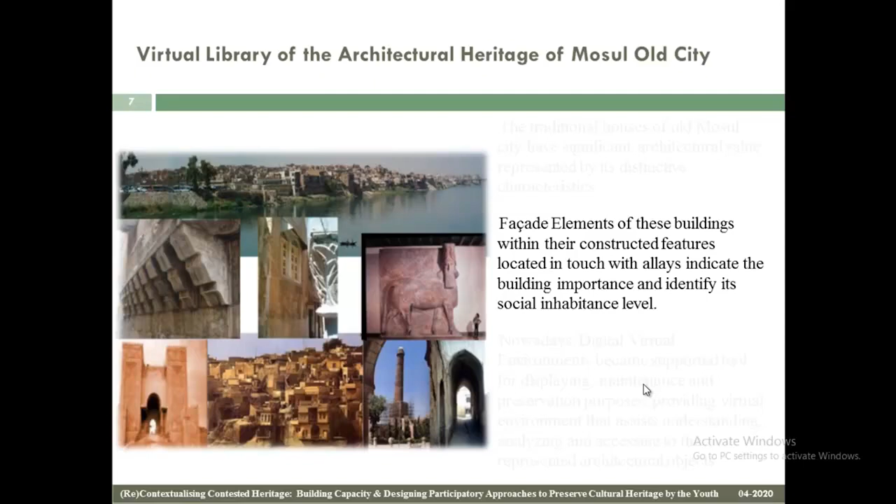The traditional houses of Old Mosul city have significant architectural value represented by their distinctive characteristics. Facade elements of these buildings, within their constructed features located in touch with alleys, indicate the building's importance and identify its social inhabitants' level.

Nowadays, digital virtual environments become a supported tool for displaying, maintenance, and preservation purposes, providing a virtual environment that assists understanding, analyzing, and accessing the represented architectural objects.

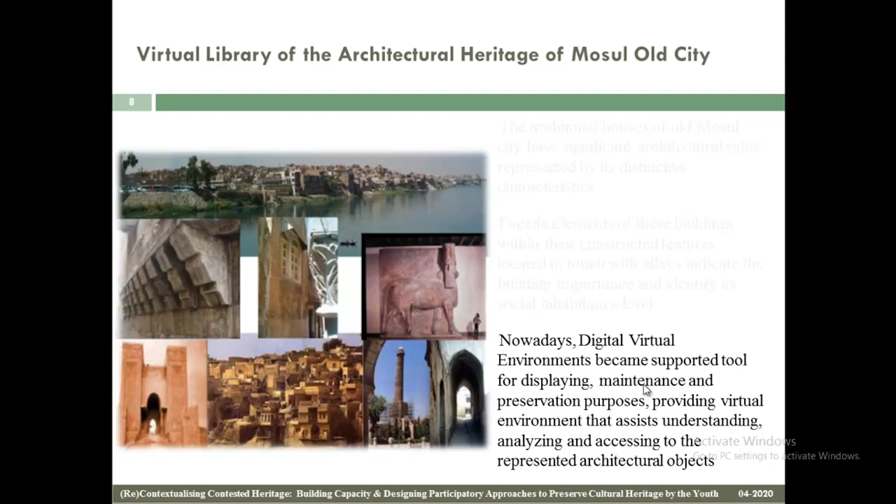The project aims to present guidelines and recommendations for creating the historic building information modeling for the entire architectural elements of the building in the Mosul Old City.

The project also aims to present an HBIM procedure for providing a virtual library for the constructed features of the facade elements of the traditional Mosul domestic buildings, as the first phase, by collecting, analyzing, and classifying these elements into categories.

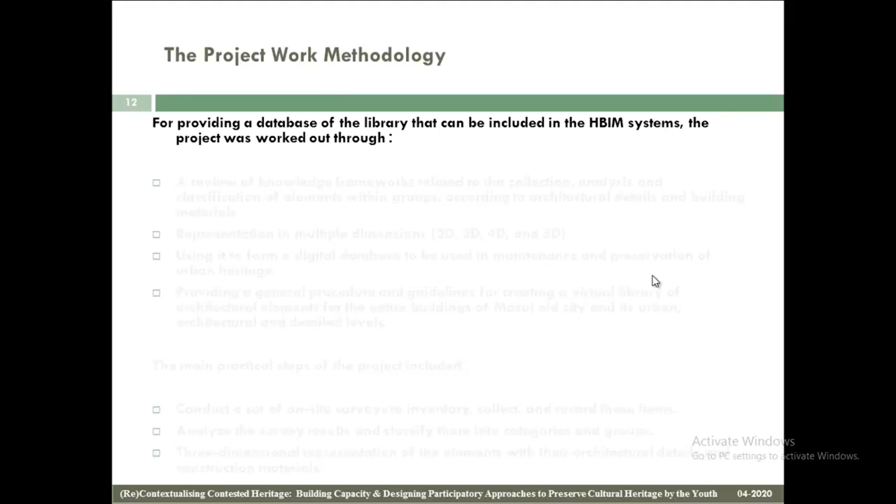For providing a database of the library that can be included in the HBIM systems, the project worked through a review of knowledge frameworks related to the collection, analysis, and classification of elements within groups according to architectural details and building materials, and representation in multiple dimensions: 2D, 3D, 4D, and 5D, using it to form a digital database.

To be used in maintenance and preservation of urban heritage, and providing a general procedure and guidelines for creating a virtual library of architectural elements for the entire buildings of Mosul Old City at its urban, architectural, and detailed levels.

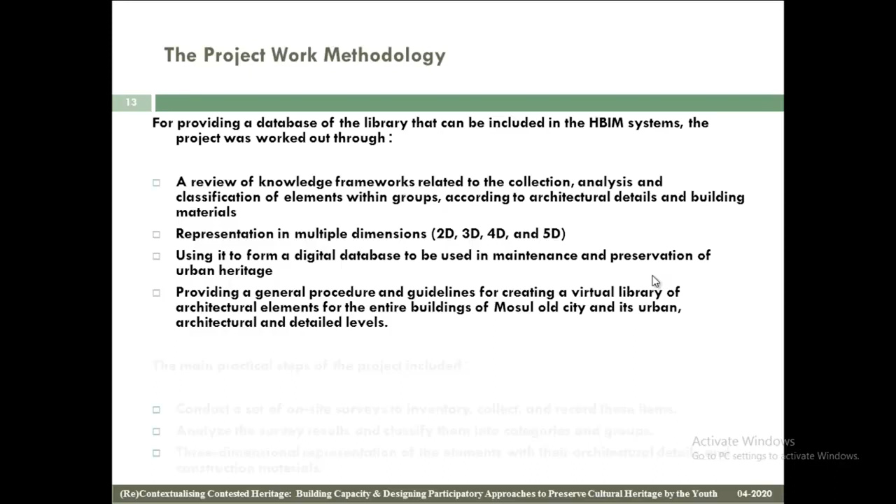The main practical steps of the project included: conduct a set of on-site surveys to inventory, collect, and record these items; analyze the survey results and classify them into categories and groups; and three-dimensional representation of the elements with their architectural details and construction materials.

To achieve the project objectives, three related aspects in key sections of this research are studied, discussed, and utilized in order to determine the information and results required. Those are conservation and Mosul Old City, and computer software such as CAD, virtual reality, and HBIM.

Here is the detailed work plan for the project. We can see the plan of this project.

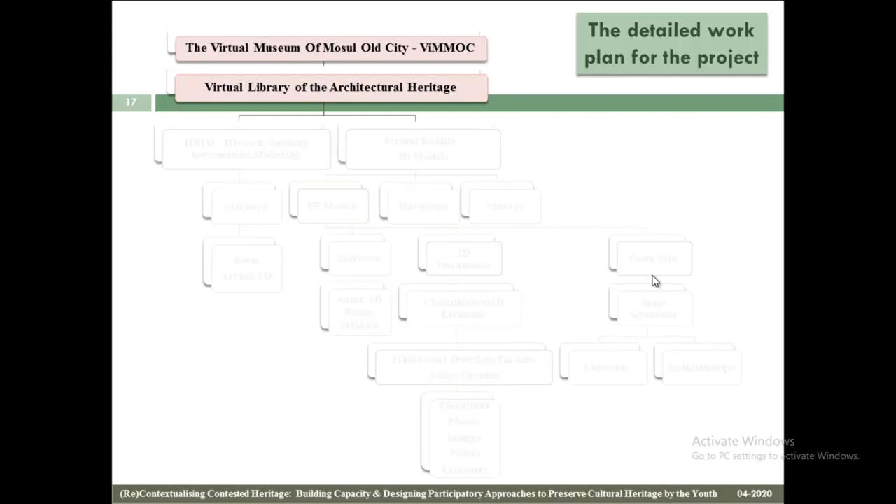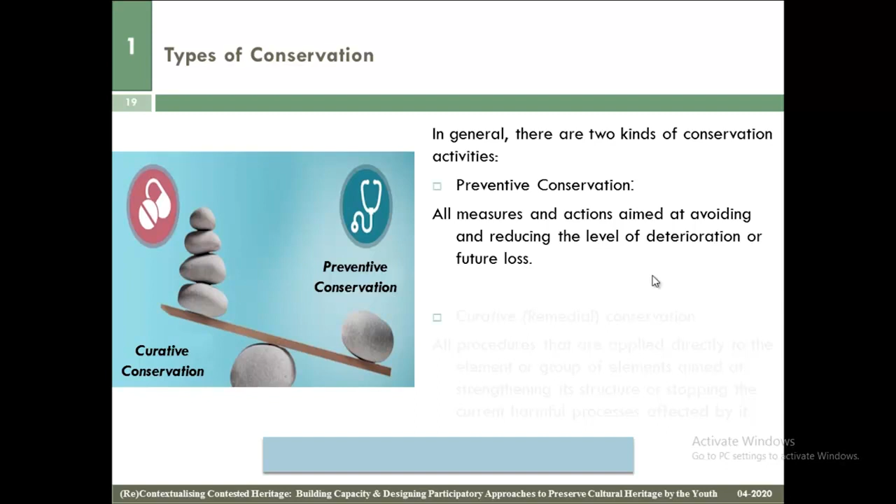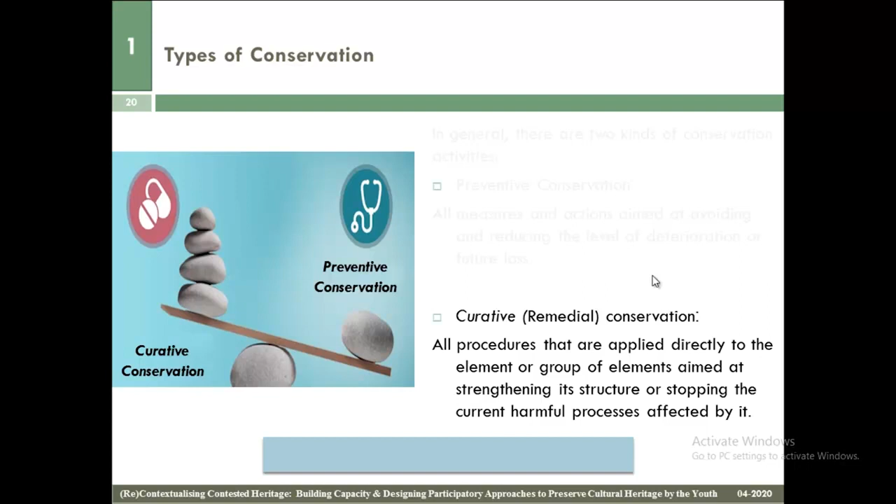Types of conservation: in general, there are two kinds of conservation activities. Preventive conservation involves all measures and actions aimed at avoiding and reducing the level of deterioration or future loss. Curative conservation involves all procedures applied directly to the element or a group of elements, aimed at strengthening its structure or stopping the current harmful processes affecting it.

Preventive conservation is directed to prevent eventual problems. It is related to the provisions about the supposed natural aging and about the expected anomalies. The timing and the frequency of preventive and completing maintenance can be expected.

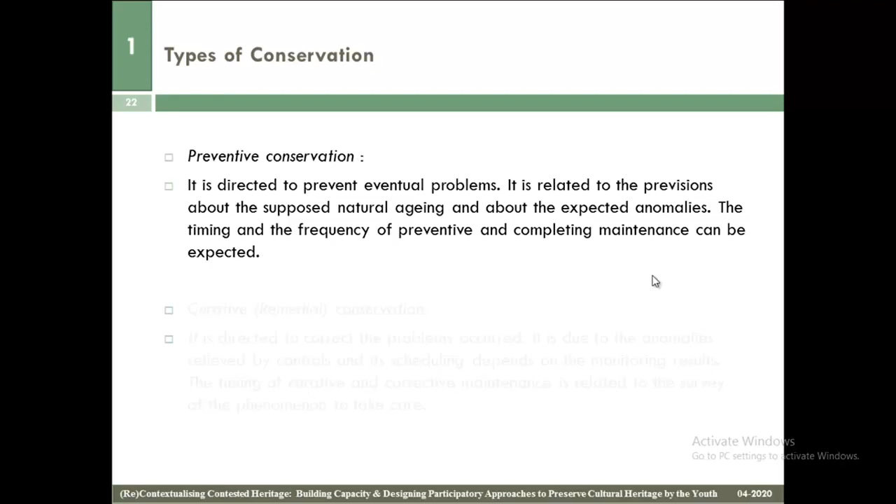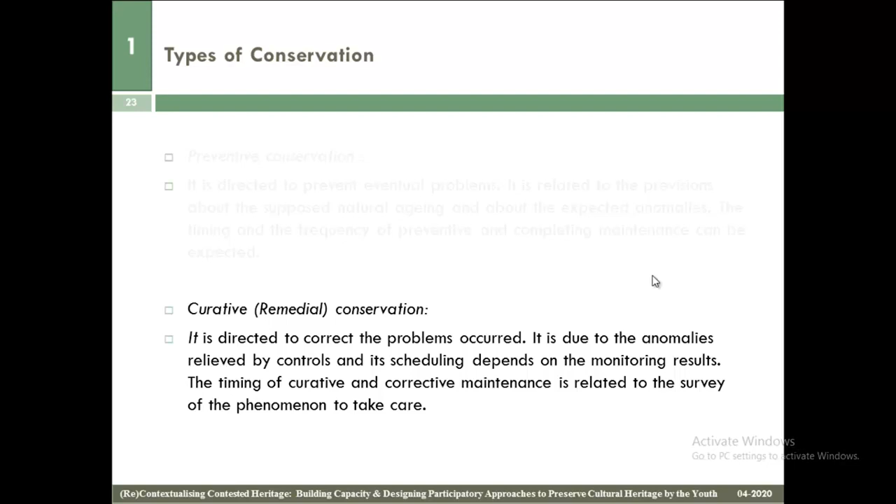While curative conservation is directed to correct problems that have occurred. It is due to the anomalies revealed by controls, and its scheduling depends on monitoring results. The timing of curative and corrective maintenance is related to the survey of the phenomenon to take care of.

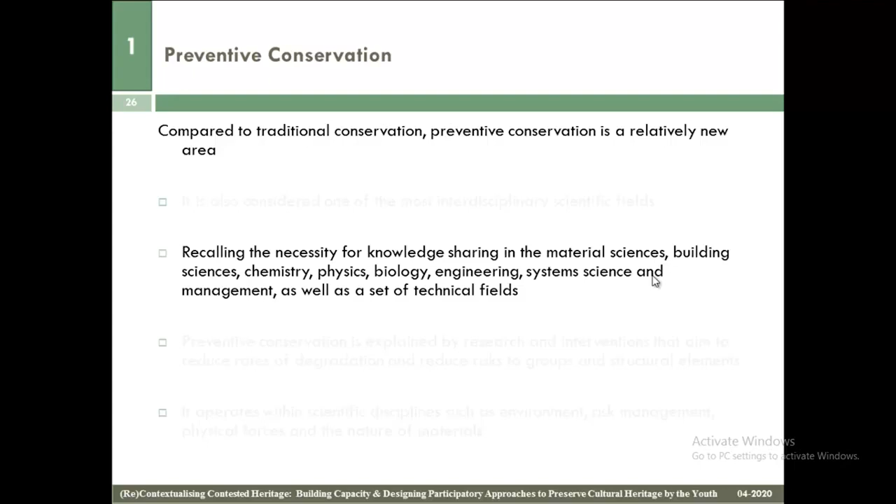Compared to traditional conservation, preventive conservation is a relatively new area. It is also considered one of the most interdisciplinary scientific fields, recalling the necessity for knowledge sharing in material science, building science, chemistry, physics, biology, engineering, system science, and management, as well as a set of technical fields.

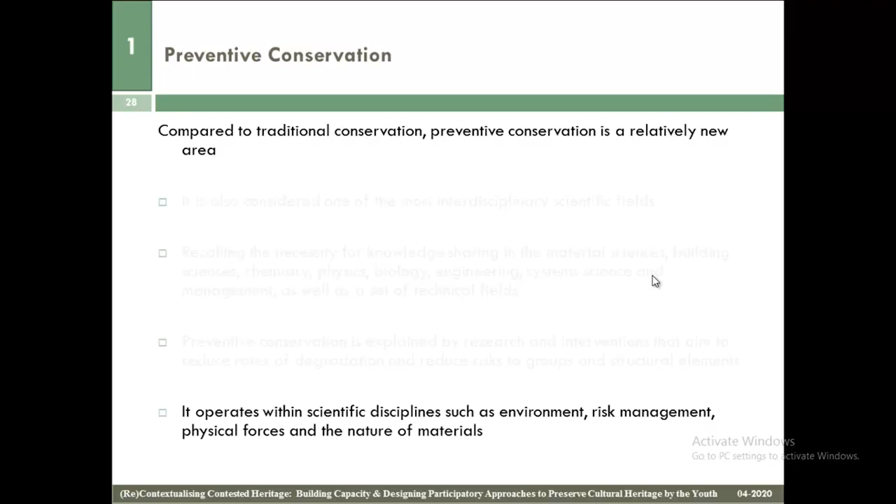Preventive conservation is exploited by research and interventions that aim to reduce rates of degradation and reduce risks to groups and structural elements. It operates with scientific disciplines such as environment, risk management, physical forces, and the nature of materials. The aspects of preventive conservation include management of environment, risk, documenting, schedule investigation, information, regulation, human resources, and communication.

What is important here is the management of information exchanging and representing.

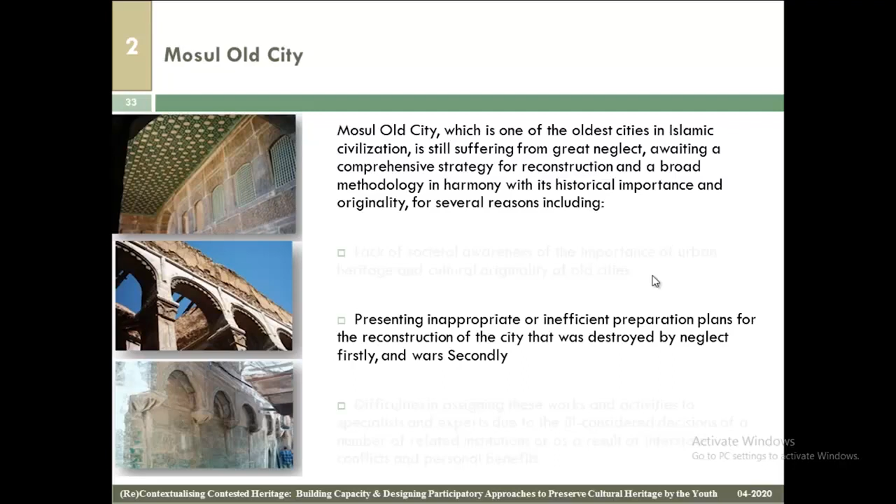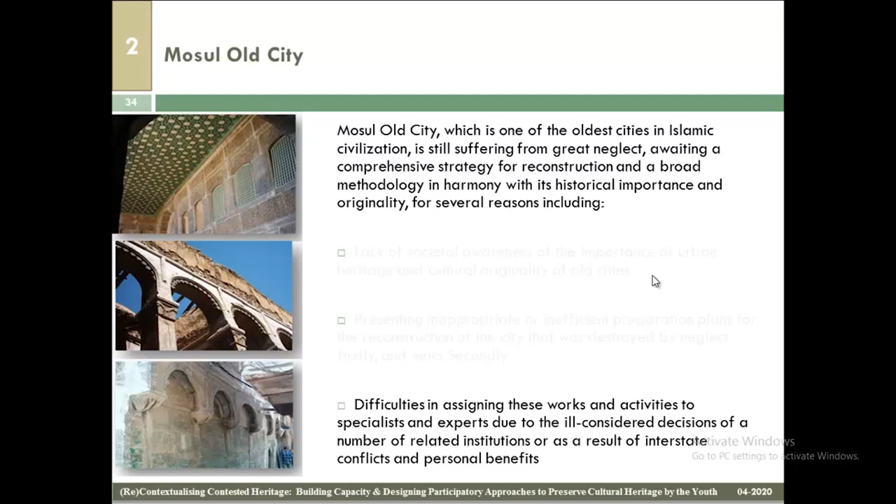The second aspect is Mosul Old City, one of the oldest cities in Islamic civilization, still suffering from great neglect, awaiting a comprehensive strategy for reconstruction and a broad methodology in harmony with its historical importance and originality. This is due to several reasons, including lack of societal awareness of the importance of urban heritage and cultural originality of cities, inappropriate or inefficient preparation plans for reconstruction of a city destroyed by neglect and then by war, and difficulties in assigning these works to specialists due to ill-considered decisions by related institutions or as a result of interstate conflicts and personal benefits.

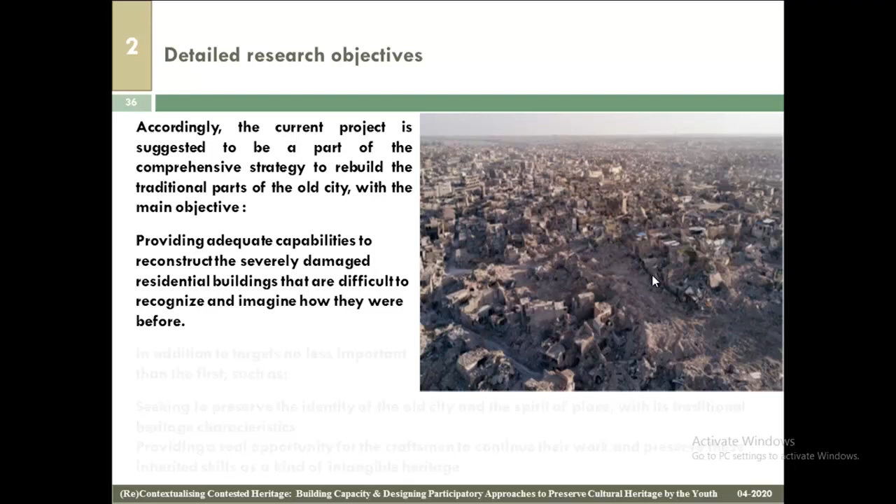Regarding the detailed research objectives, the current project is suggested as part of a comprehensive strategy to rebuild the traditional parts of the old city, with the main objective of providing adequate capabilities to reconstruct severely damaged residential buildings that are difficult to recognize and imagine how they were before.

In addition, there are targets no less important than the first, such as seeking to preserve the identity of the old city and the spirit of a place, genius loci, with its traditional heritage characteristics, and providing a real opportunity for craftsmen to continue their work and preserve these inherited skills as a kind of intangible heritage.

The detailed research objectives are: documentation of knowledge, formalization of information, providing common references for inhabitants of the cities, designers and architects in their projects, multi-dimensional representation as a means of study of historic buildings, simulation of restoration of buildings partly or completely destroyed, and data management on internet networks.

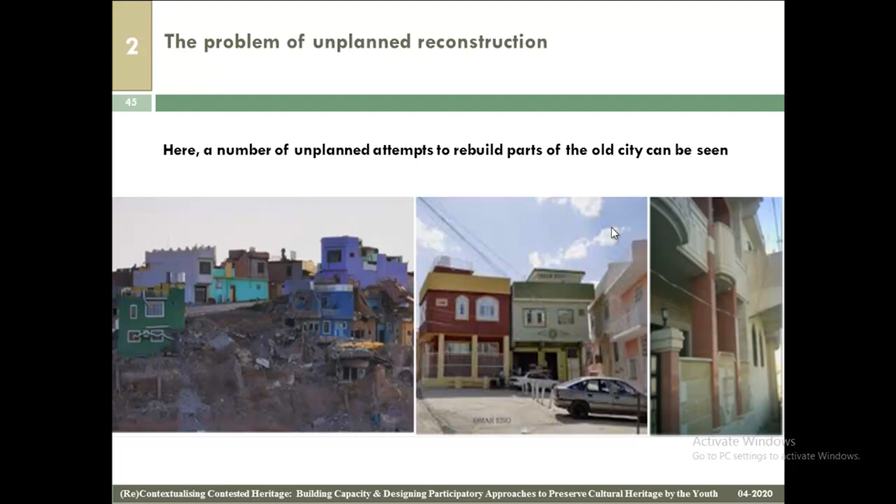Here we can see a number of unplanned attempts to rebuild part of the old city of Mosul.

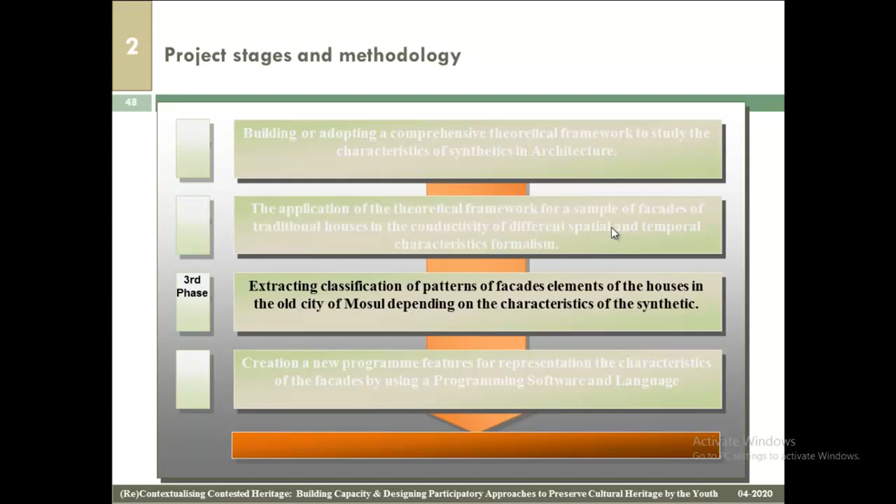Here is the project stage and its methodology, which consists of 4 phases to create the virtual library.

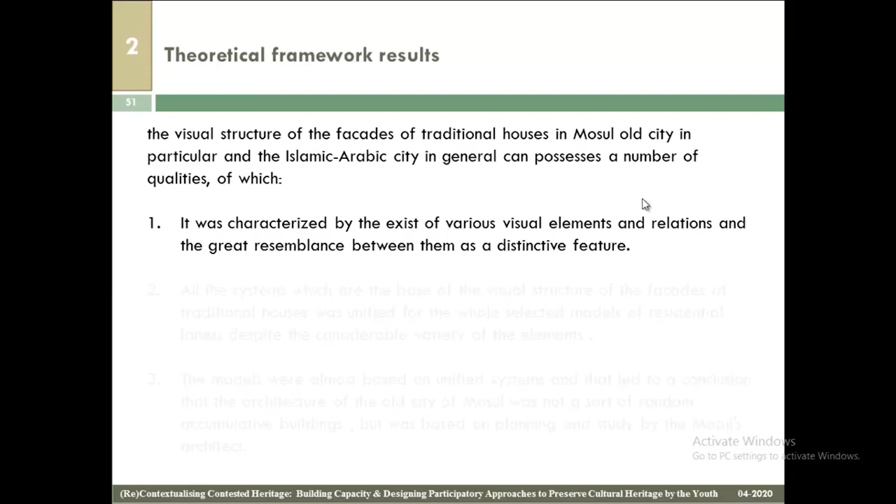The theoretical framework results in the visual structure of the facades of traditional houses in Mosul Old City in particular, and the Islamic Arabic city in general, possessing a number of qualities characterized by the existence of various visual elements and relations, with great resemblance between them as a distinctive feature.

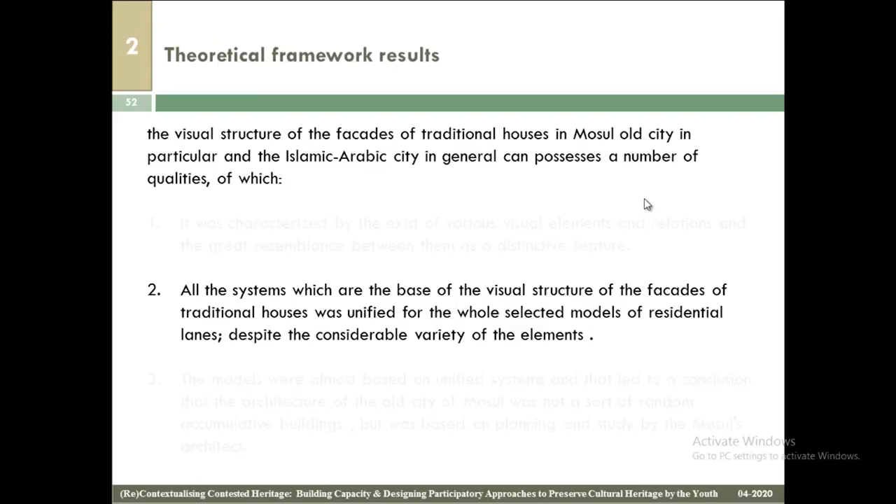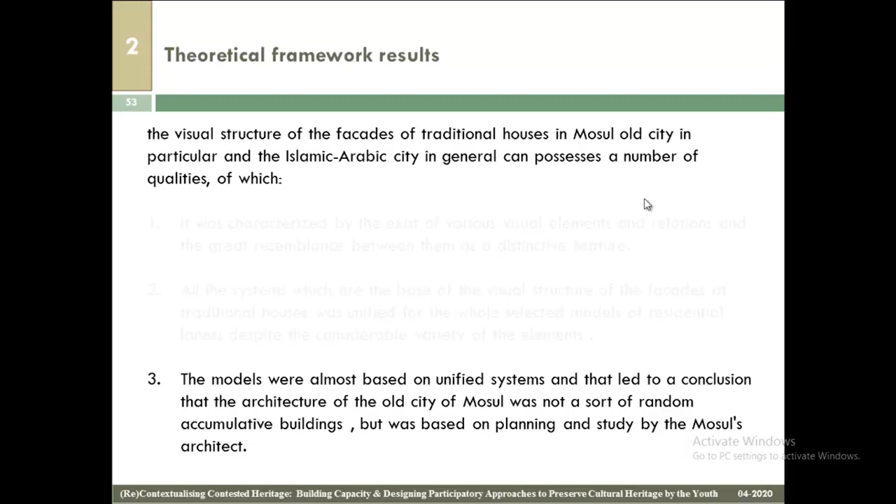All the systems that form the base of the visual structure of the facades of traditional houses were unified across the whole selected model of residential lanes, despite considerable variety of elements. The models were almost based on unified systems, leading to the conclusion that the architecture of the old city of Mosul was not a sort of random accumulative buildings, but was based on planning and study by Mosul's architects.

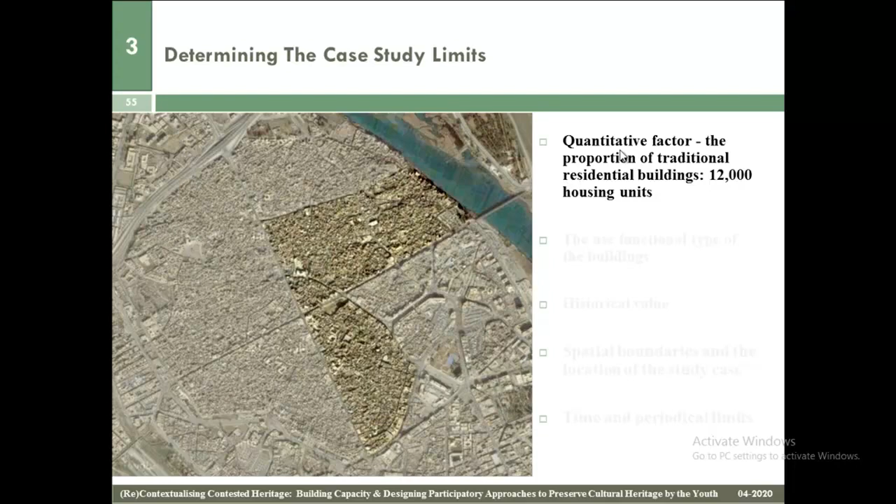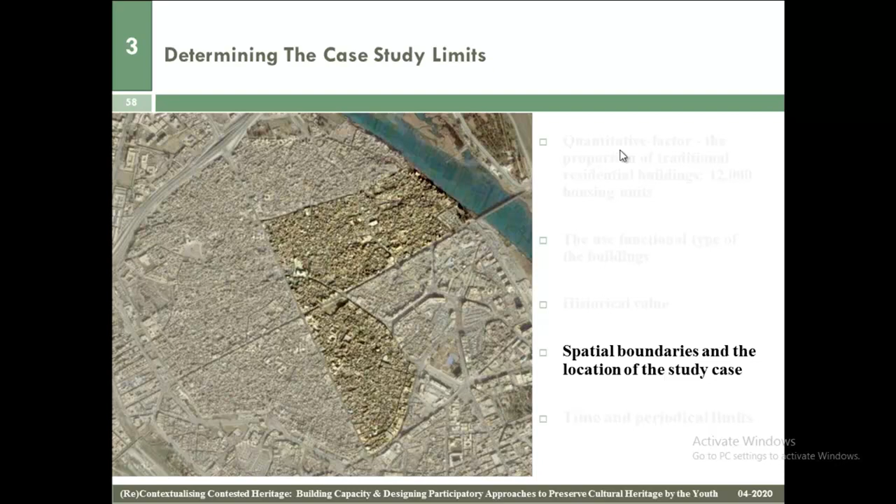Determining the case study limits depends on many factors, such as the quantitative factor - the proportion of traditional residential buildings, about 12,000 housing units - the functional use type of the buildings, historical value, spatial boundaries, the location of the study case, and time and periodical limits.

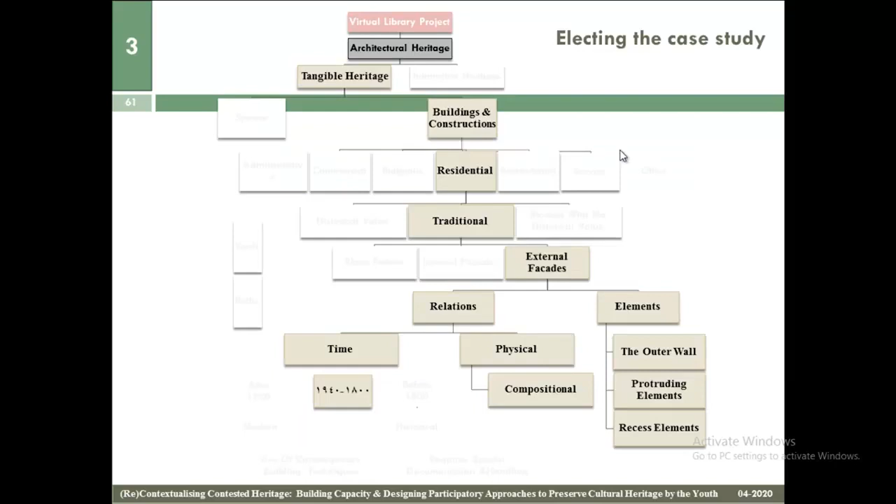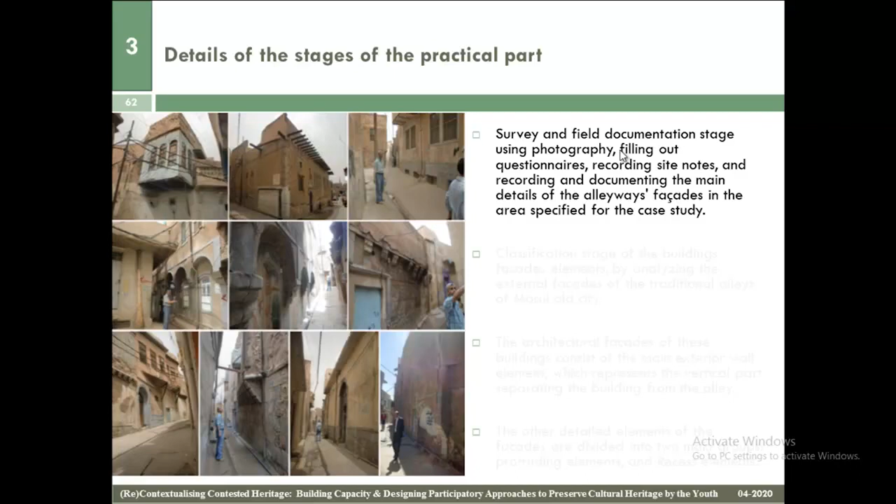Details of the practical stage: the survey and field documentation stage using photography, filling out questionnaires, recording site notes, and recording and documenting the main details of the alleyway facades in the area specified for the case study.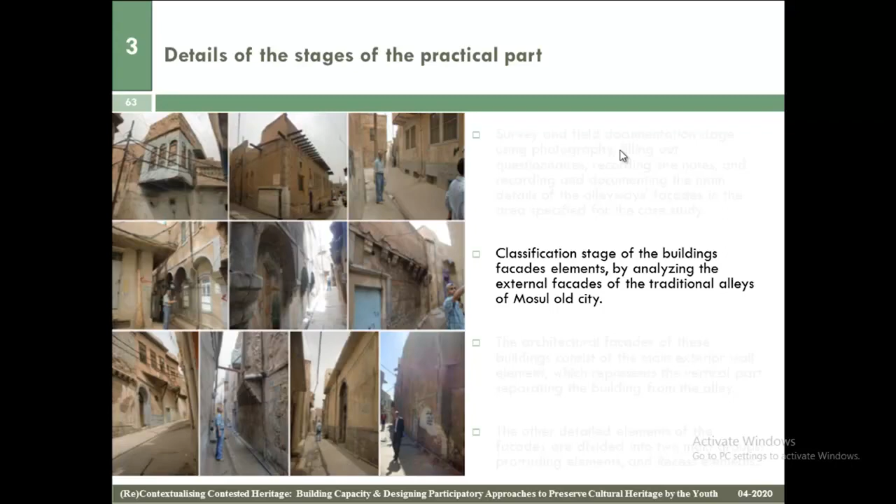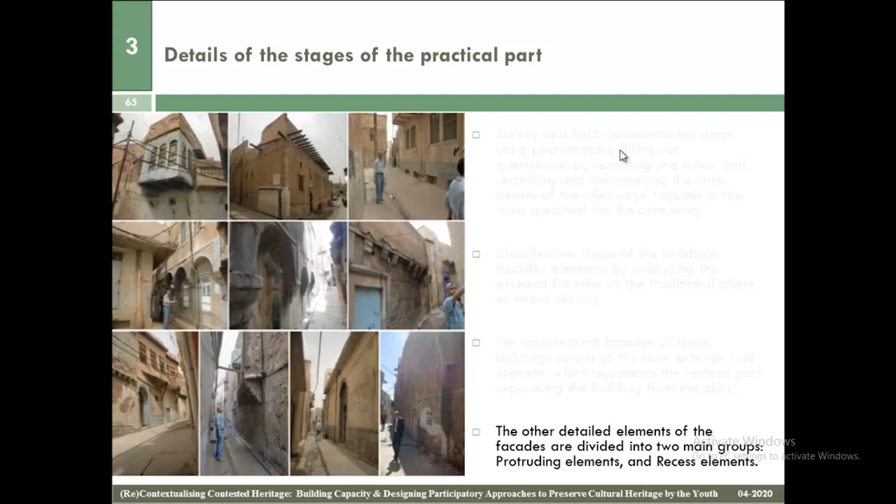Then the classification stage of the building's facade elements, by analyzing the external facades of the traditional alleys of Mosul Old City. The architectural facades of these buildings consist of the main exterior wall element, representing the vertical parts separating the building from the alley. The other detailed elements of the facades are divided into two main groups: protruding elements and recessed elements.

Based on that, the elements were divided into these groups: framing elements such as doorways, windows, and apertures; striping elements like cornices, friezes, corners, and skirting; reinforcing structural elements for the upper floors, corbels, and arches; elements of mass protruding, shanashil, and balconies; structural elements of support, horizontal and inclined supports; and attached elements within the alley, such as tents, stairs, and skyline.

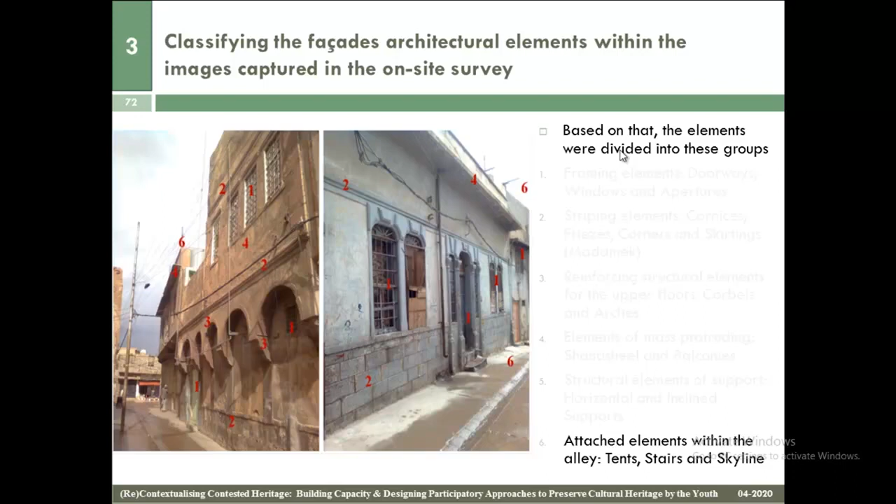Subsequently, a folder was created for each group, and the documentation photographs of particular items were distributed among the groups, with the possibility of repeating the same image in more than one group, as an image could contain more than one detailed element. The main folders of the element groups are labeled as follows: doors and gates, windows and openings, arches, friezes and cornices, corbels, corners, shanashil, skirting marble, supporting and tent, and finally parapet, handrail, railing, and guy line.

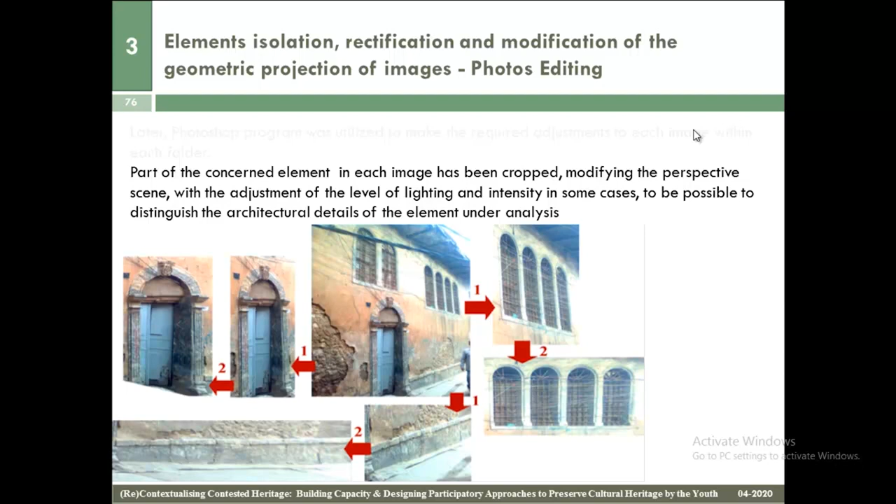Later, Photoshop was utilized to make the required adjustments to each image within each folder. Part of the concerned element in each image has been cropped, modifying the perspective scenes with adjustments of the level of lighting and intensity in some cases, to make it possible to distinguish the architectural details of the element under

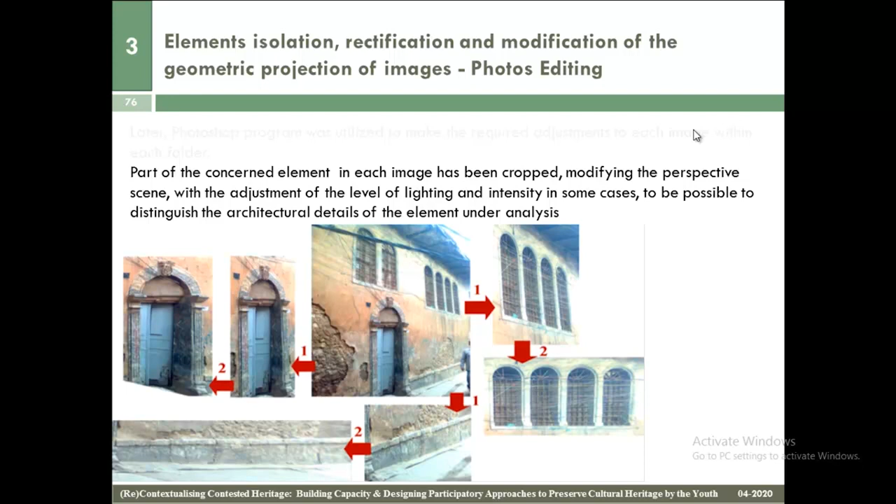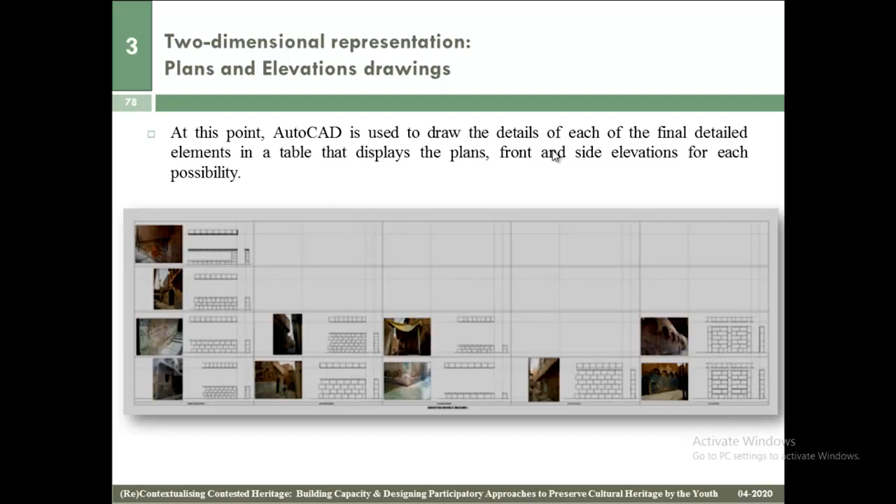analysis. Then, by dividing the possibilities of one element into secondary groups, several folders have been created. The phase of two-dimensional representation: at this point, AutoCAD is used to draw the details of each of the final detailed elements in a table that displays the plans, front and side elevations for each possibility.

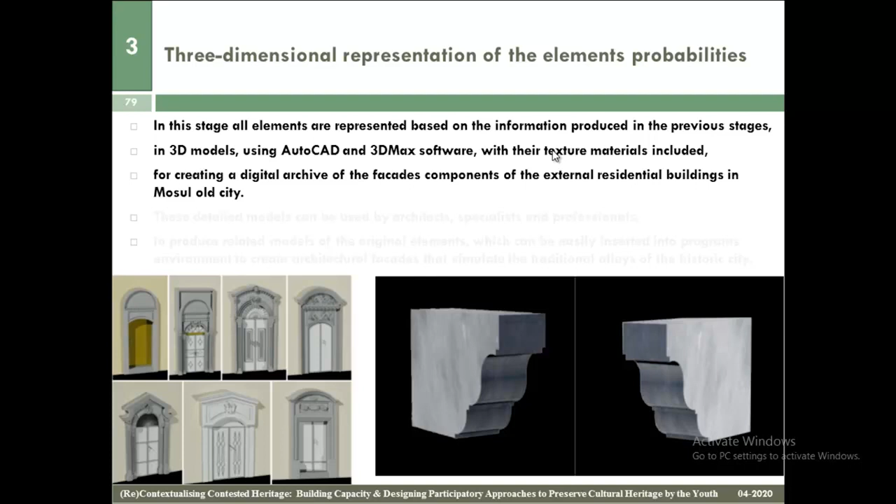Three-dimensional representation of the element probabilities. In this stage, all elements are represented based on the information produced in the previous stages in 3D models using AutoCAD and 3DMax software, with their texture material included, for creating a digital archive of the facade components of the external residential buildings in Mosul Old City.

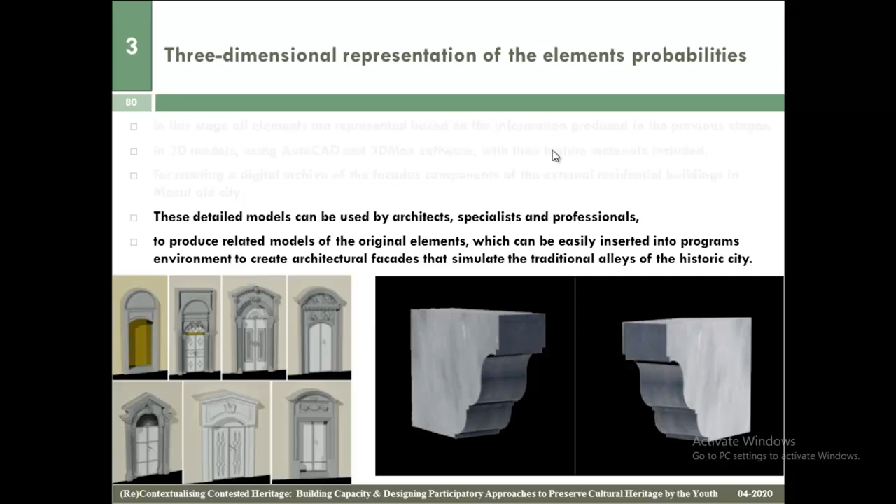The detailed models can be used by architects, specialists, and professionals to produce related models of the original elements, which can be easily inserted into program environments to create architectural facades that simulate the traditional alleys of the historic city.

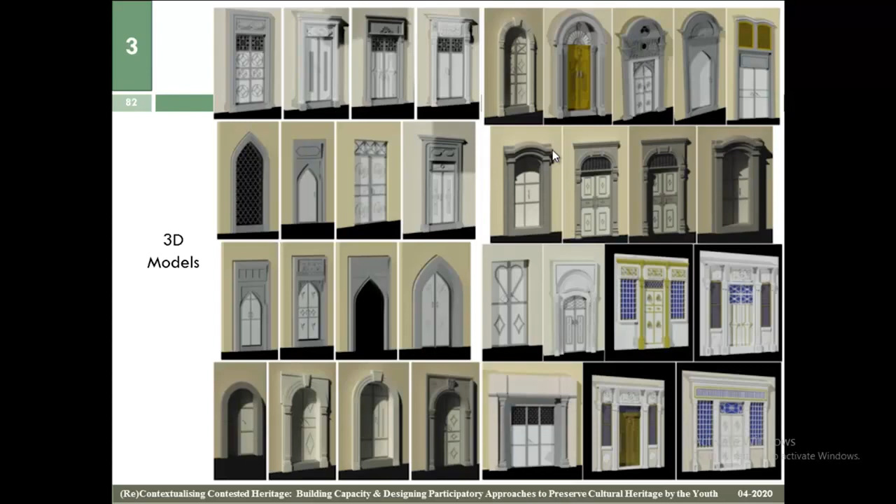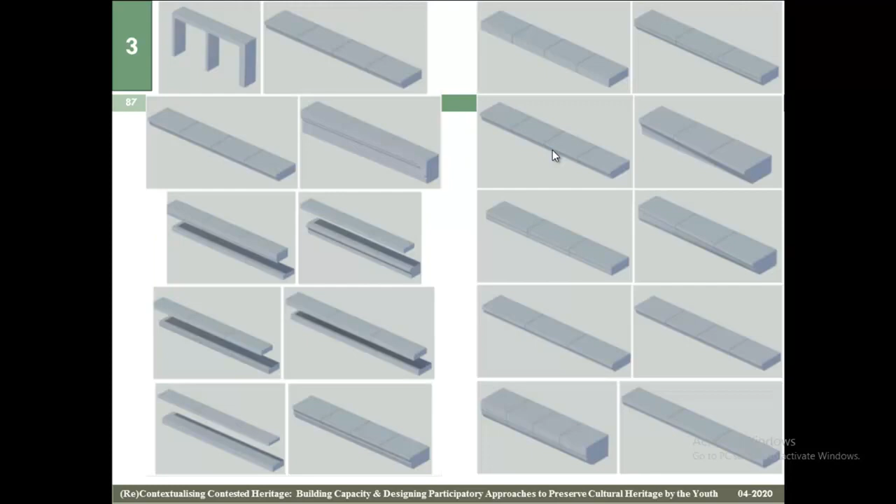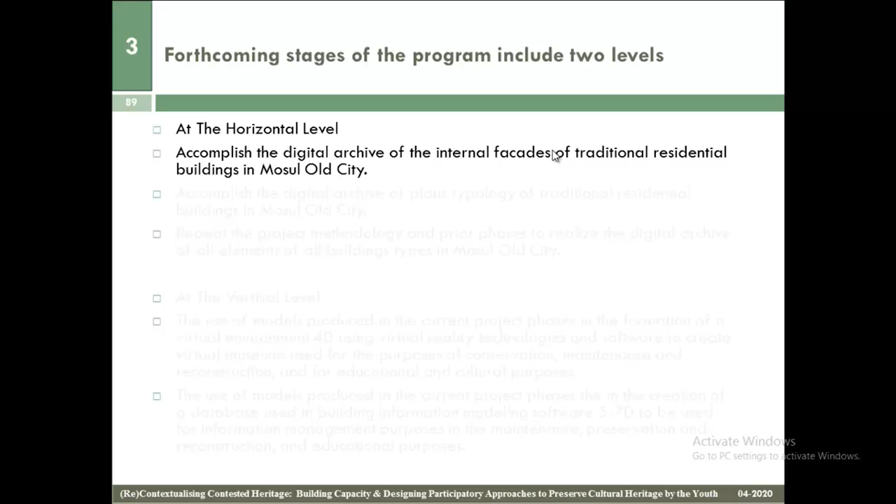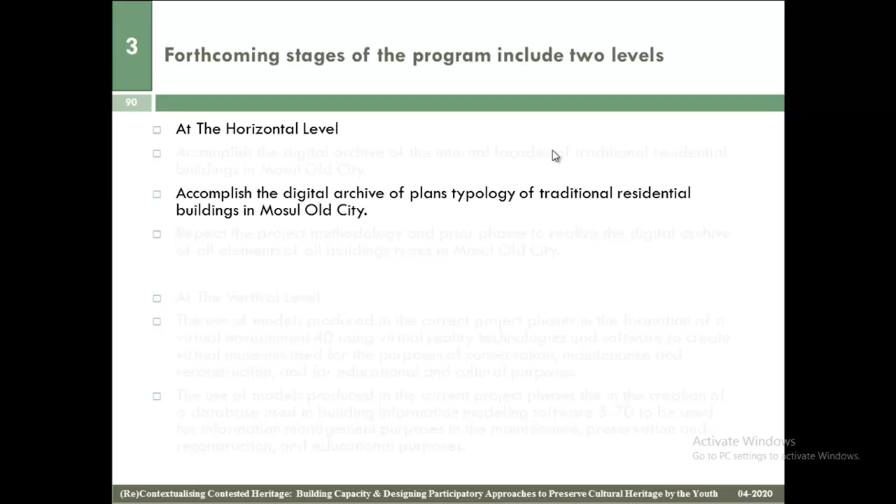Forthcoming stages of the program include two levels. At the horizontal level: accomplish the digital archive of the internal facades of traditional residential buildings in the city. Accomplish the digital archive of plan typology of traditional residential buildings in the city. Repeat the project methodology and prior phases to realize the digital archive of all elements of all building types

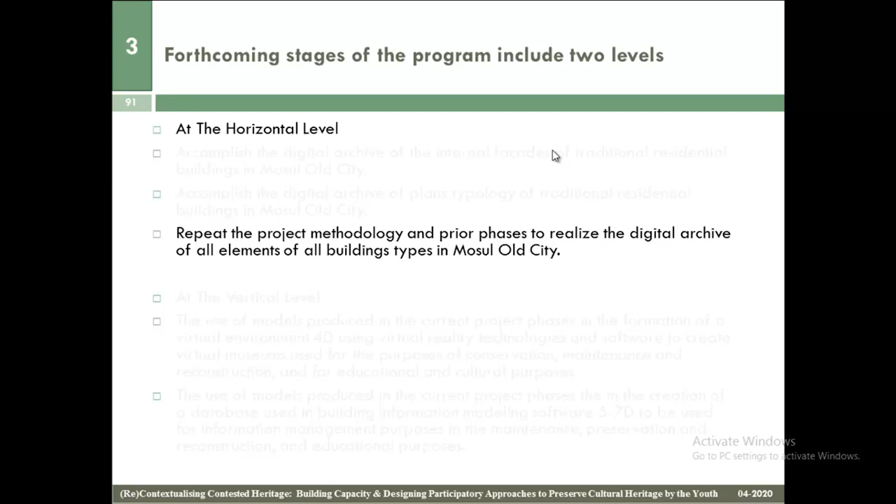in Mosul Old City. At the vertical level, the use of models produced in the current project phases in the formation of a 4D virtual environment using virtual reality technologies and software to create virtual museums used for the purposes of conservation, maintenance, and reconstruction, and for educational and cultural purposes.

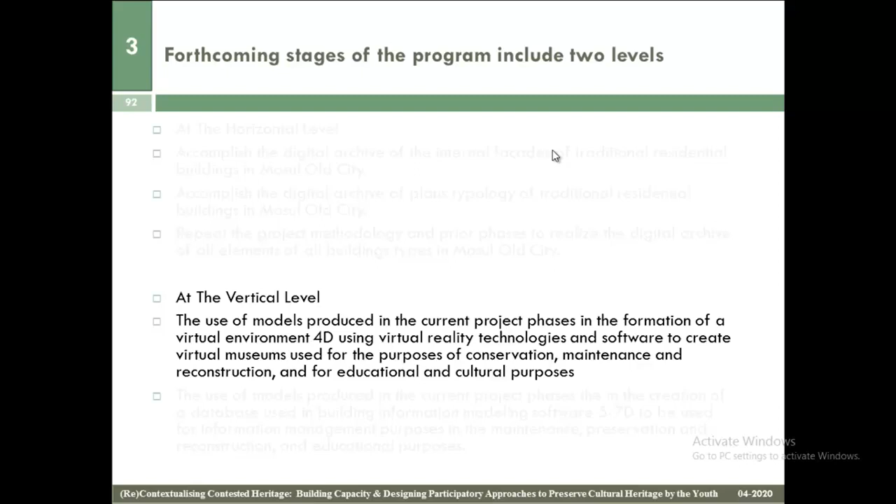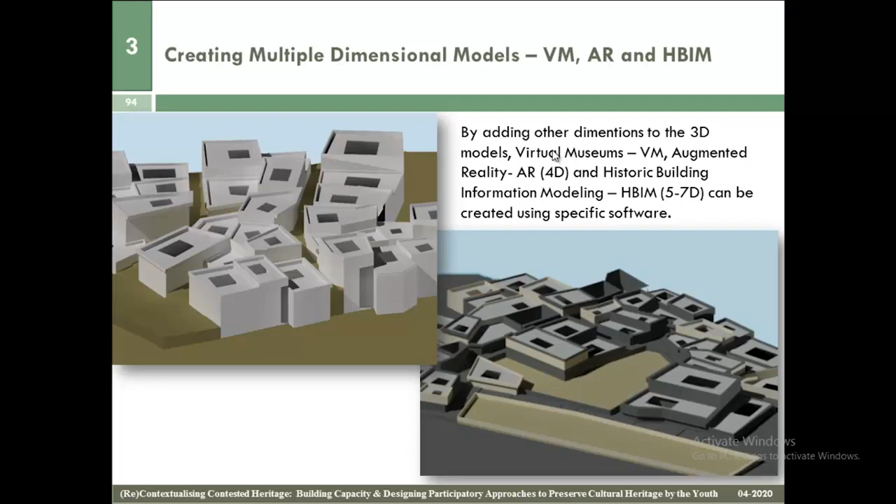The use of models produced in the current project phases in the creation of a database used in building information modeling software, 5D to 7D, to be used for information management purposes in maintenance, preservation, reconstruction, and educational purposes. Multiple dimensional models, by adding other dimensions to the 3D models, virtual museums, augmented reality, and historic building information modeling, can be created using specific software.

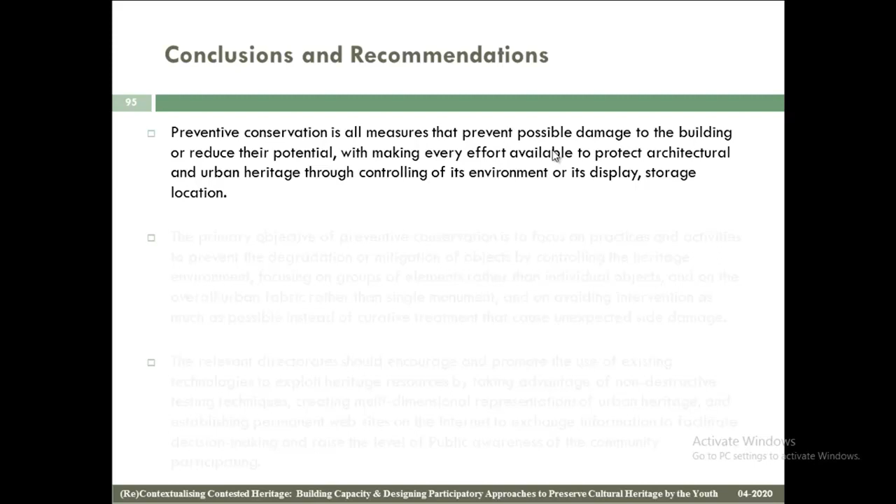For the conclusion and recommendations, preventive conservation is all measures that prevent possible damage to the building or reduce its potential, making every effort available to protect architectural and urban heritage through controlling its environment or its display and storage location.

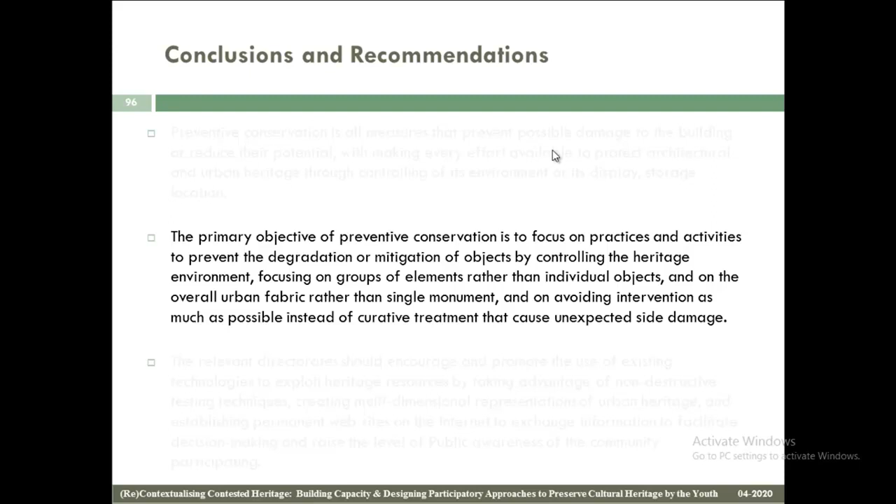The primary objective of preventive conservation is to focus on practices and activities to prevent the degradation or mitigation of objects by controlling the heritage environment, focusing on groups of elements rather than individual objects, on the overall urban fabric rather than a single monument, and on avoiding interventions as much as possible instead of curative treatment that causes unexpected side damage.

The relevant directorates should encourage and promote the use of existing technologies to exploit heritage resources by taking advantage of non-destructive testing techniques, creating multi-dimensional representations of urban heritage, and establishing permanent websites on the internet to exchange information, facilitate decision-making, and raise the level of public awareness and community participation.

The results of the analysis of the heritage elements in Mosul Old City showed that there is a great diversity in their types and their structural and visual relations, with great homogeneity and harmony between these different elements. This demonstrates the attempt of old Mosul's architects to enrich and improve the facades of traditional alleyways through the details

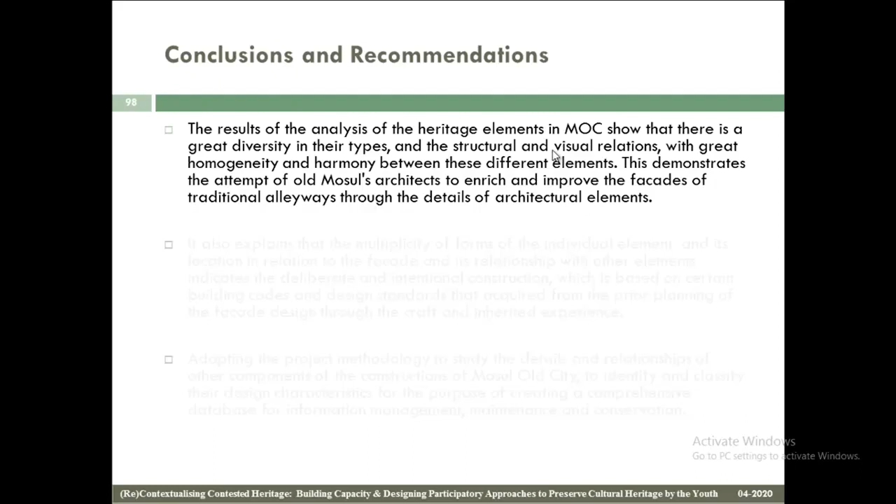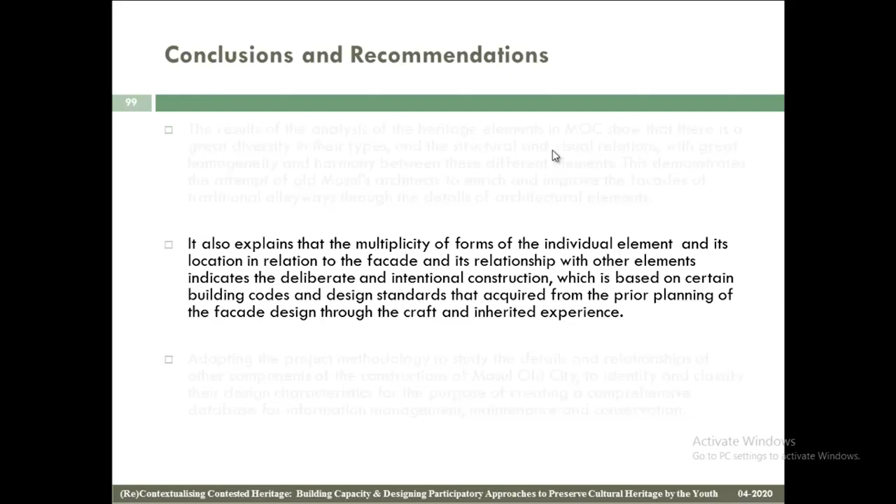of architectural elements. It also explained that the multiplicity of forms of the individual element, its location in relation to the facade, and its relationship with other elements indicate deliberate and intentional construction, based on certain building codes and design standards acquired from prior planning of the facade design through craft and inherited experience.

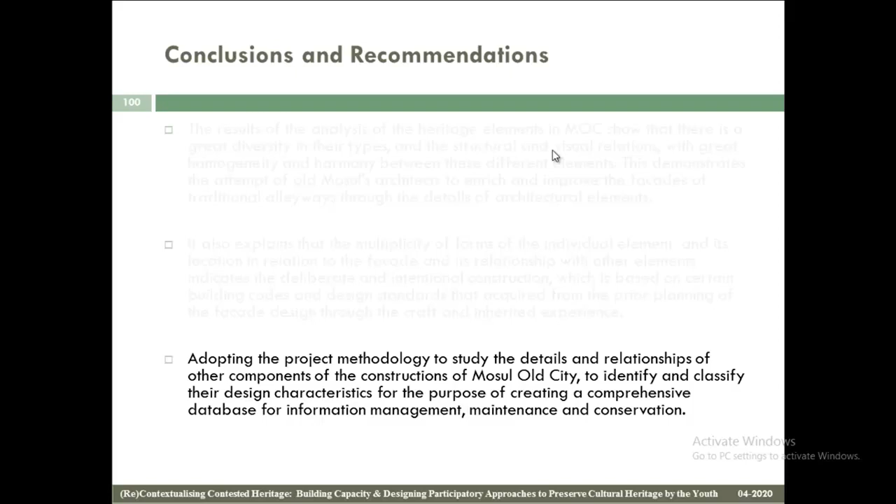Adopting the project methodology to study the details and relationships of other components of the constructions of Mosul city to identify and classify their design characteristics for the purpose of creating a comprehensive database for information management, maintenance, and conservation.